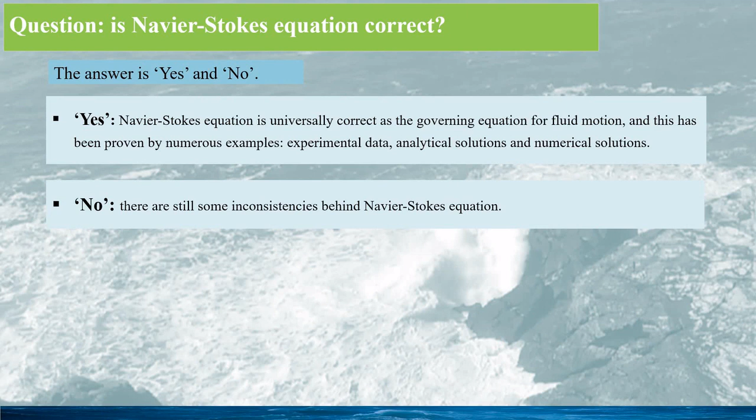For no, that's because there are still some inconsistencies behind the Navier-Stokes equation, specifically on the symmetrical stress tensor for fluid.

It is well known the Cauchy symmetrical stress tensor was originally developed for elastic material, the solid, and then fully adopted for fluid by Cauchy himself.

But how can we explain exceptions for the asymmetrical stress tensor found in real fluids? Is this Cauchy's law for angular motion also a prerequisite for fluids?

Can we have a different way to derive the Navier-Stokes equation? In this talk, I will answer all these questions.

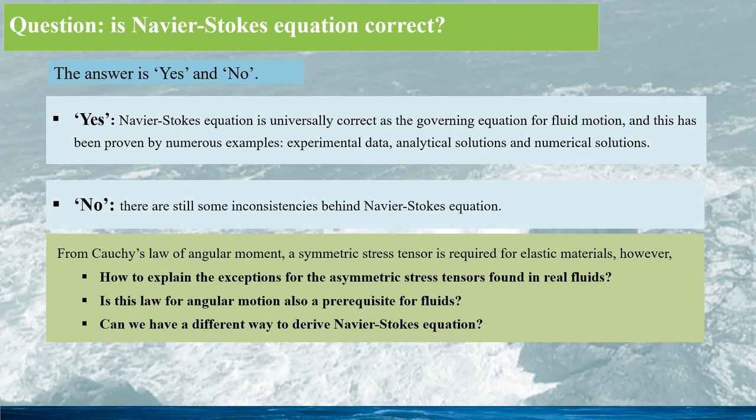First, let us look at a simple classical flow, the Couette flow. The Couette flow is confined between two large parallel plates. The lower plate is fixed and the upper plate moves at a constant speed at a distance h.

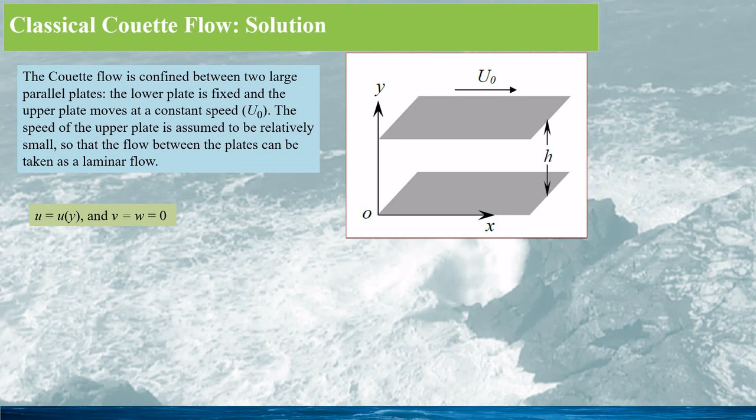The moving speed of the upper plate is assumed small, so the flow confined between these two plates is laminar. Based on the analysis of the problem, we can see the velocity components v and w are 0, and u is a function of y only.

As such, the Navier-Stokes equation can be simplified to this simple partial differential equation. Applying the boundary condition, we find the solution.

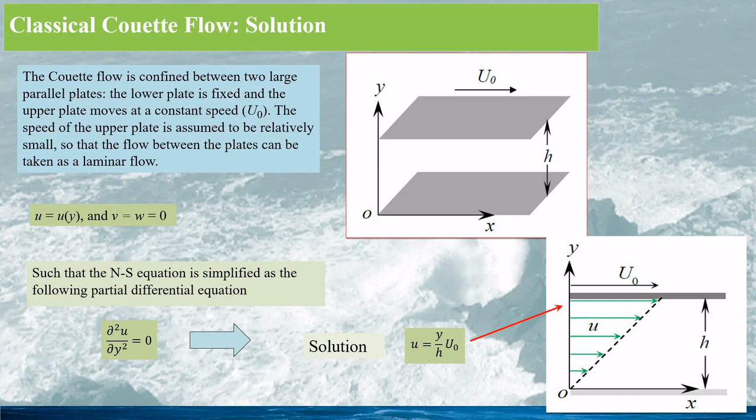This is a very simple flow. From the plot, we can see the flow velocity increases linearly with y.

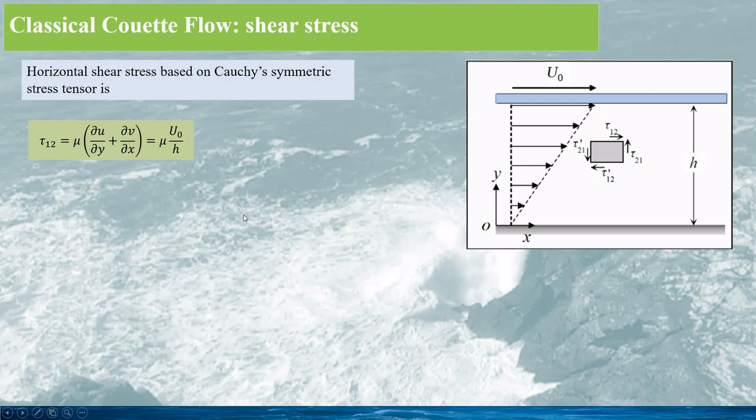In this slide, we are going to look at the shear stress in the classical Couette flow. From Cauchy's symmetrical stress tensor, we can easily calculate the horizontal shear stress tau12 as this. And from the requirement of the symmetrical stress tensor, the vertical shear stress tau21 is calculated like this.

We can see both horizontal and vertical shear stresses are non-zero. If we look at this, based on the symmetrical stress tensor, we have tau12 equals tau21, and tau prime 12 equals tau prime 21.

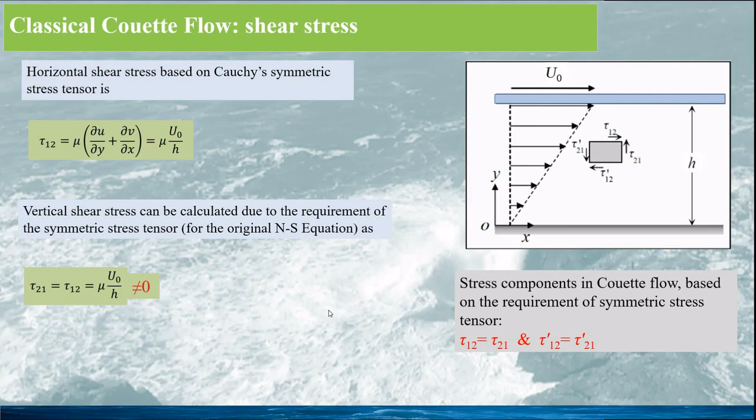Let's go back to the definition of fluid. From the fluid definition, it states a fluid cannot bear any shear stress at rest, and under shear stress, the fluid flows in the direction of the applied stress.

From the definition, it is easy to understand the horizontal shear stress tau12, because we have the horizontal flow in the Couette flow. But for the symmetrical stress tensor, there must be a non-zero vertical shear stress tau21.

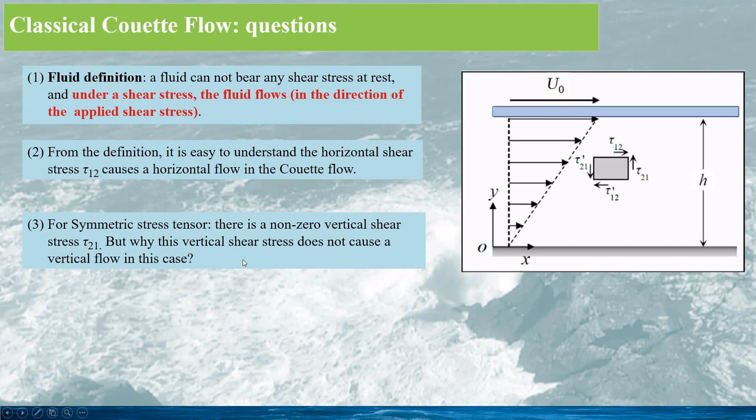However, why does this vertical shear stress not cause a vertical flow? From the fluid definition, in the Couette flow it can be concluded the vertical shear stress tau21 is 0.

The shear stress tensor in this case would be asymmetric, i.e. tau12 is not equal to tau21, since in the flow tau12 is non-zero, but the vertical shear stress tau21 is 0.

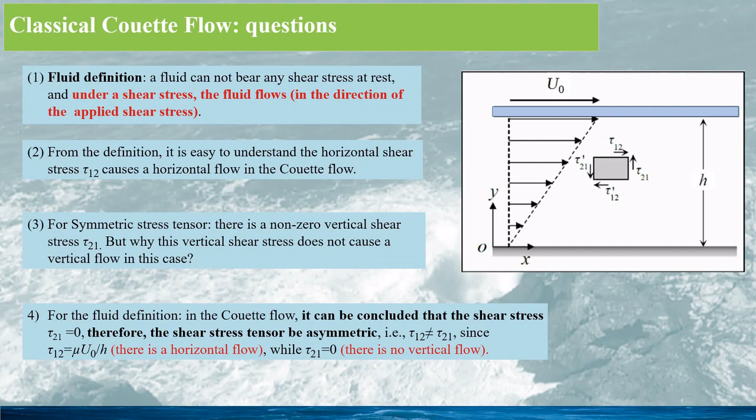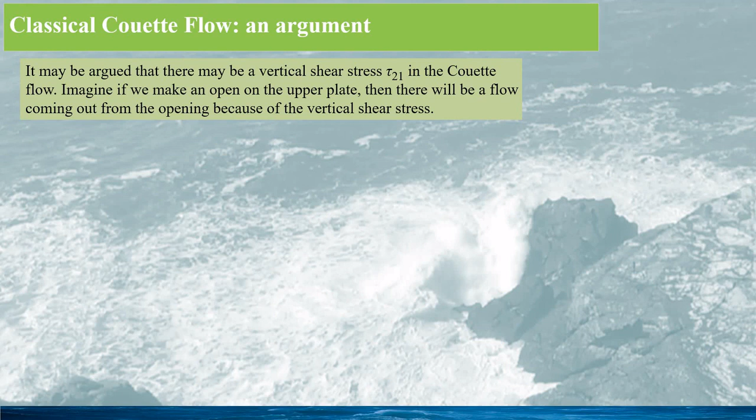There may be an argument that in the Couette flow there is a vertical shear stress, because the upper plate stops the flow moving in the vertical direction.

The answer for this is no, because in reality, whether there will be flow flowing out from the opening totally depends on the pressure of the flow between the plates. If the flow speed is large enough, there might be a suction of the flow in the opening instead of the flow flowing out.

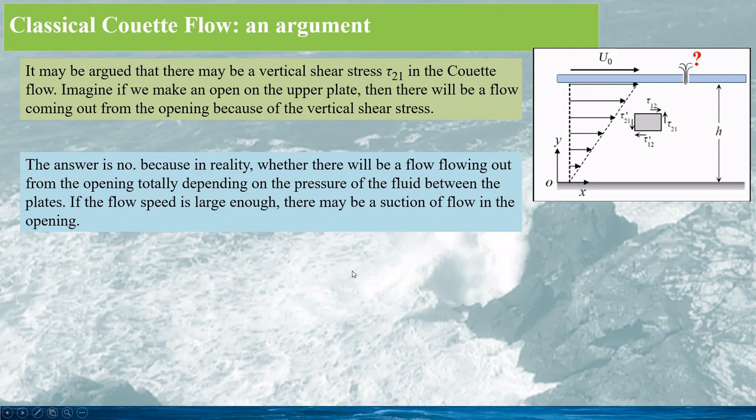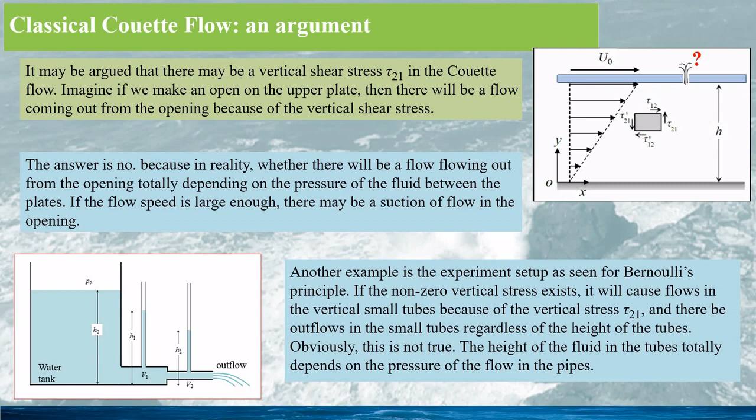Now we look at the situation for a shear stress applied on an element as seen in the figure. We will see what will happen if the element is a solid and if the element is a fluid.

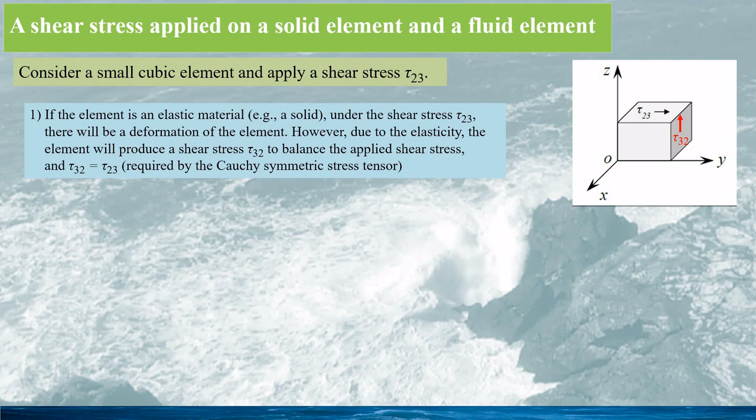If the element is an elastic material, for instance a solid, under the shear stress tau 2 3, there will be a deformation of the element. However, due to the elasticity of the element, there will be a shear stress tau 3 2 produced to balance the applied shear stress, and tau 3 2 equals tau 2 3. This is required by Cauchy's symmetrical stress tensor.

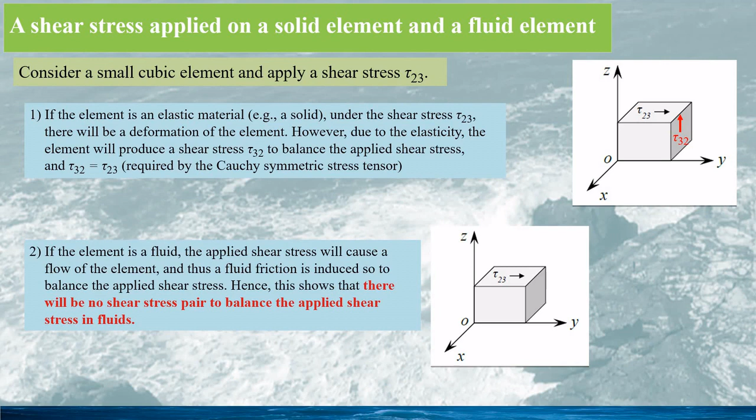If this element is a fluid, the applied shear stress will cause the flow of the element, from the definition of the fluid. Because of the flow, a fluid friction is induced to balance the applied shear stress. Hence, in this case, there will be no shear stress pair to balance the applied stress in fluid.

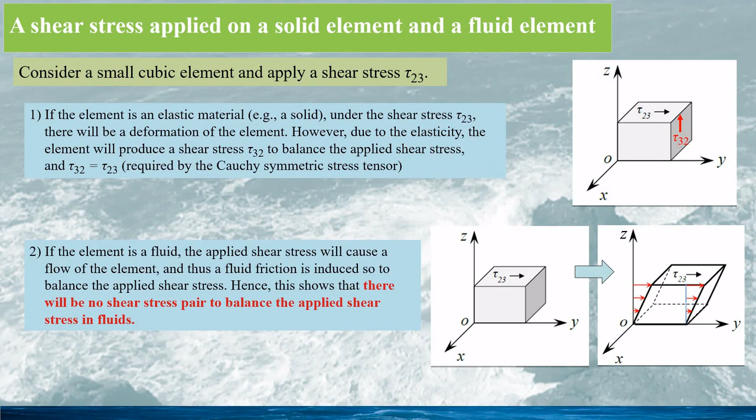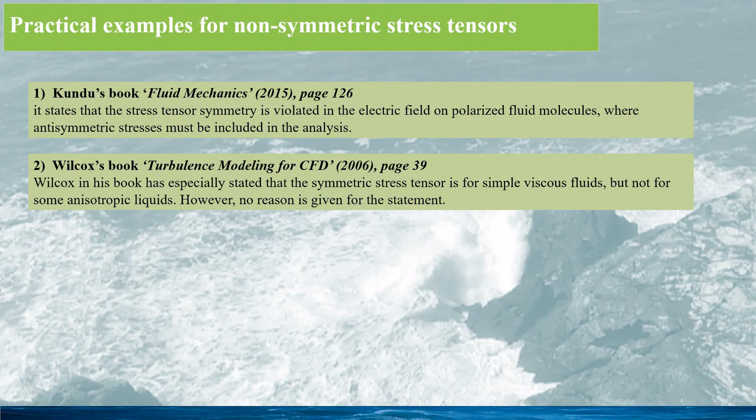Another example is the Wilcox book, Turbulence Modeling for CFD. On page 39, there is a statement: the symmetrical stress tensor is for simple viscous fluids, but not for some anisotropic liquids. There is no reason given for the statement.

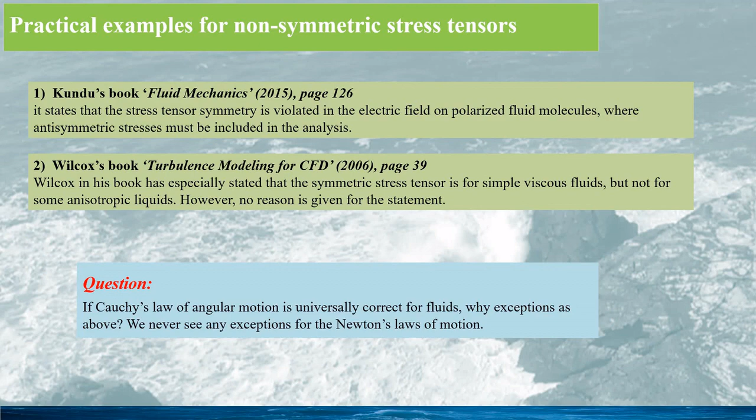Therefore, there will be a question: if Cauchy's law of angular motion is universally correct for fluids, what exceptions do we have as above? We never see any exceptions for Newton's laws of motion.

As we know from Newton's definition of fluid friction, the fluid viscous force is caused due to the different fluid speed at two joint spatial locations.

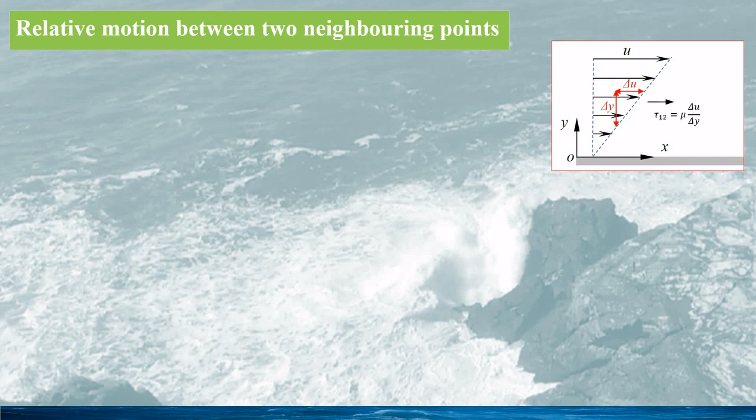Here we'll take two neighboring points in the field, A and B, and their relative velocity at a certain time is calculated here. For point A, its position and velocity are given as this, and for B, the neighboring point, its position and velocity can be simply expressed as the position and velocity of point A plus the small increment such as delta x, delta y, delta z, delta u, delta v, and delta w.

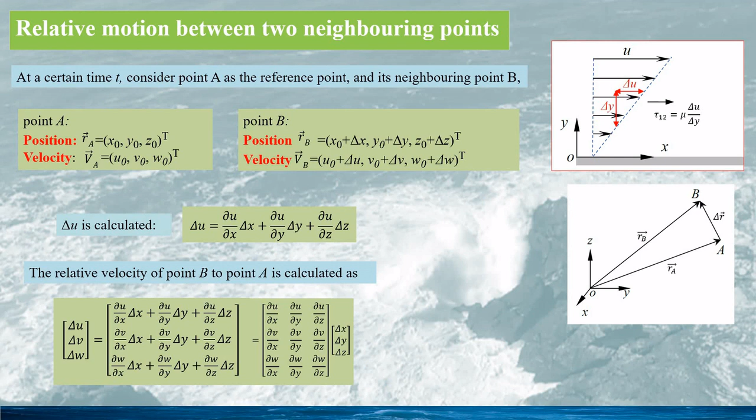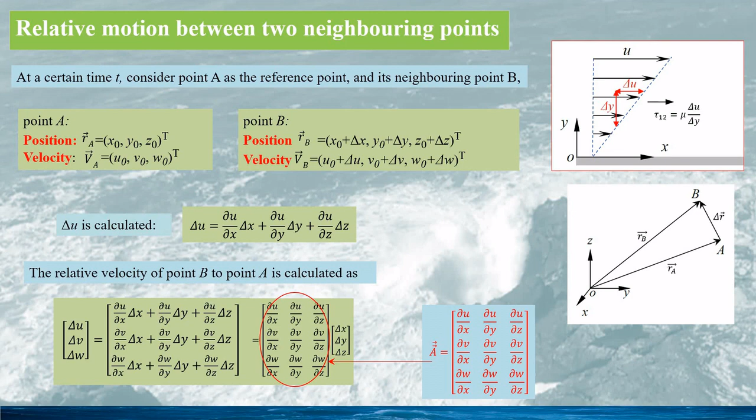For the relative increment, it is given by this. The velocity vector increment can be expressed as this, and this is the dot product of the strain rate tensor and the relative position vector delta r. Here we can see the strain rate tensor is not symmetrical.

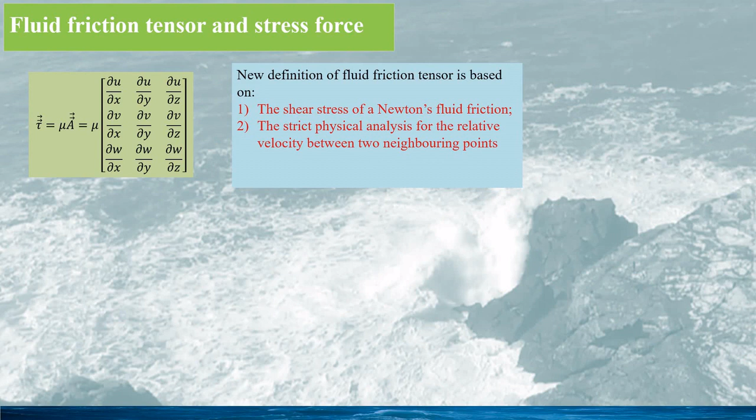Based on the strain rate tensor, a new fluid friction tensor can be defined as this. This can also be called the fluid stress tensor, but it is different from the normal symmetrical stress tensor. This tensor is based on Newton's definition of fluid friction. It is from the strict physical analysis for the different velocity between two neighboring points in fluids. A symmetry for the stress tensor is not required here.

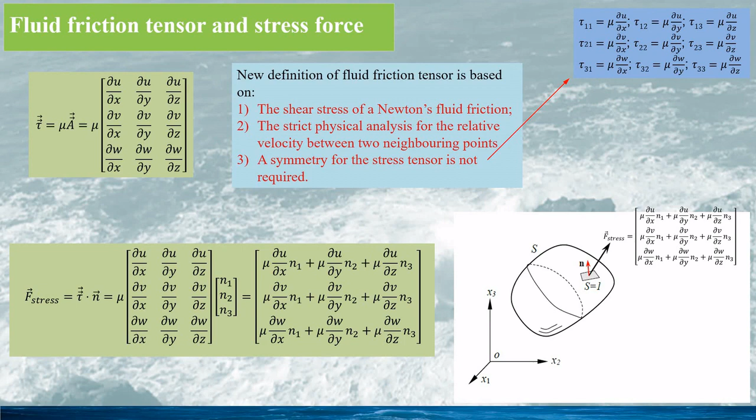From the stress tensor, the fluid stress force on a unit surface is calculated as this. In a plot, the stress force on a unit surface is given by this.

From the stress force on a unit surface, it can be seen the stress force in the x direction, Fx, is caused due to the increment of the velocity component u only, and the increment can be in the x, y, or z direction, as seen in the differentiations with regard to x, y, and z. Similarly, the stress forces in y and z directions, Fy and Fz, are only related to the corresponding velocity component increments of v and w.

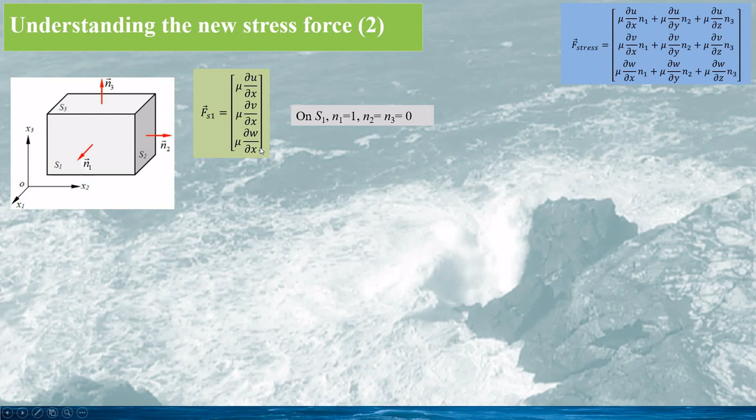Now we look at the special surfaces of a cube, S1, S2, and S3, on which the normal vectors all have only one component. On S1, N1 equals 1, and N2 and N3 are 0. So the force on S1 has 3 components, and same on S2 and S3.

So if we draw this stress force component on the surfaces, we can have the drawing as this. From this drawing, it can be seen that the new stress tensor has a better physical significance than that of the symmetrical stress tensor.

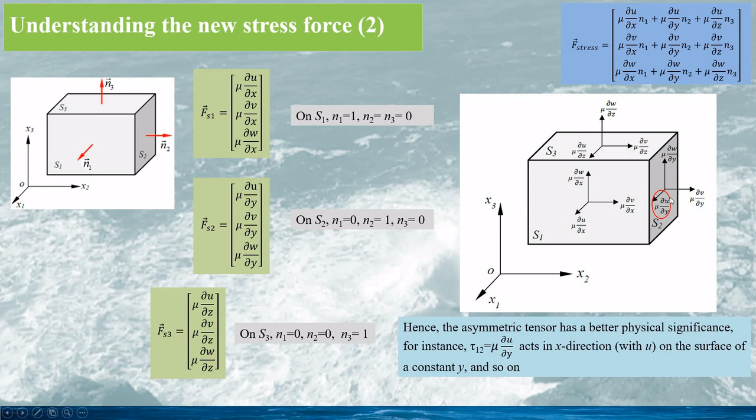For example, we can see the stress force acts in the x direction on a surface of constant y. You can see this is the x direction because of the velocity increment on the y surface here.

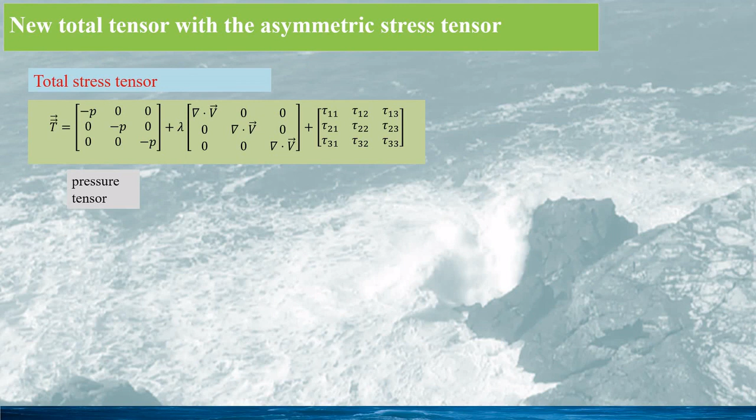Now we look at the total stress tensor. This is very similar to the symmetrical stress tensor. The total stress tensor contains basically three terms: the term from the pressure, the term representing the fluid compressibility, where lambda is the second viscosity coefficient, and this is the friction stress tensor. But here, the friction stress tensor is not symmetric, and the divergence of the total tensor is given by this.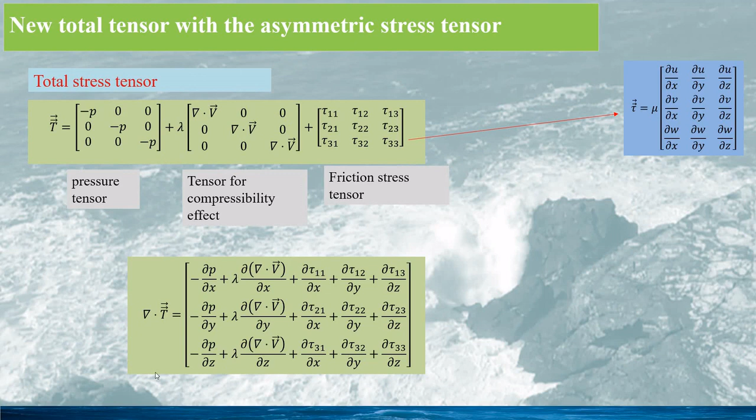Now we look at the last three terms for each component in the divergence of the total tensor, and also apply the new defined stress tensor. So we have the equation as this, and this, and this for velocity component u.

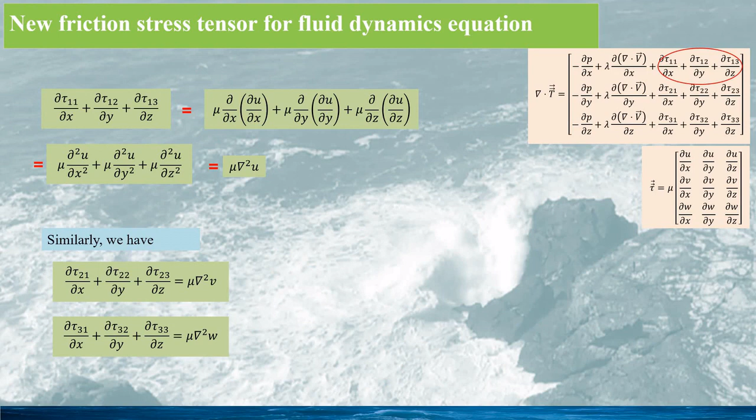Similarly, we can calculate the last three terms in the second component of the divergence of the total tensor, and the third component as this.

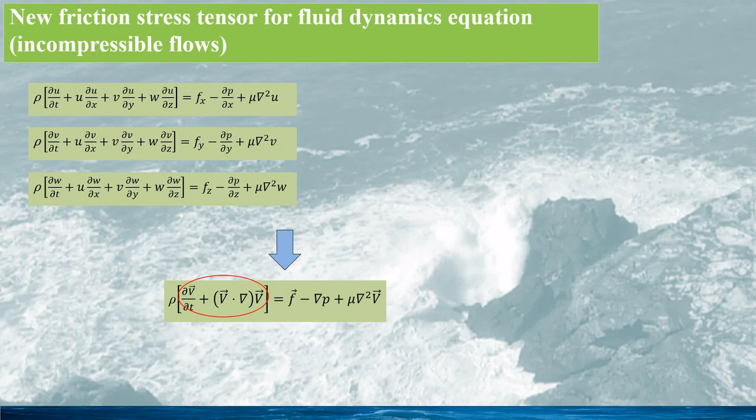Now we consider the incompressible flows. Putting all this together, we have the momentum equations for the incompressible flow. Writing this in vector form, it is this. And you can see from here, the substantial derivative is used in this way.

For the compressible flow, the momentum equation can be derived from the transport theorem with the assumption of the second viscosity coefficient, lambda, as 1/3 of the fluid viscosity, mu.

Writing this equation into vector form, so we have the momentum equation for the compressible flow. This is the same equation as the momentum equation in the Navier-Stokes equation for compressible flow.

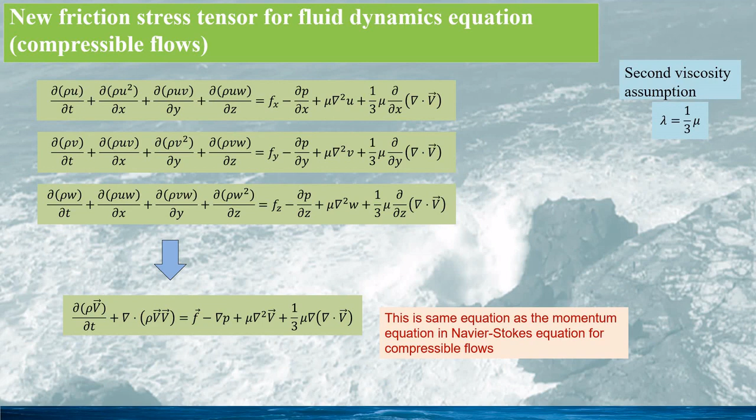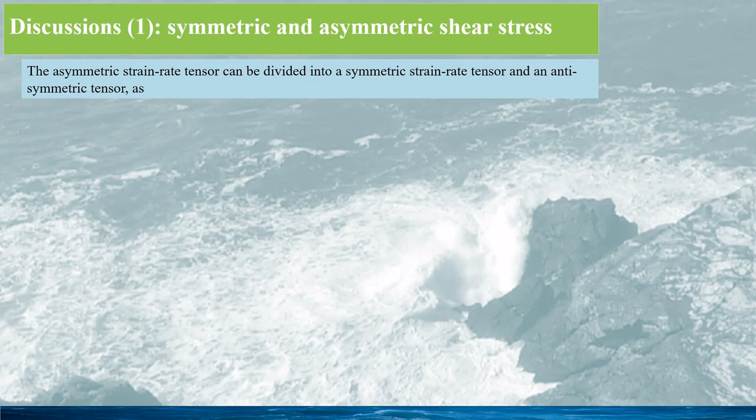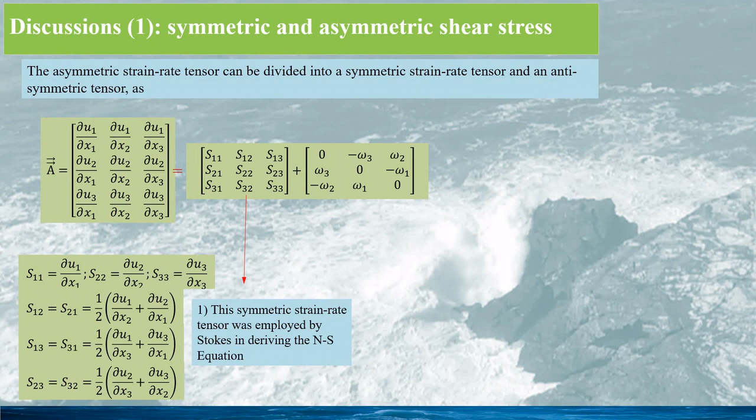We have discussed the symmetrical and asymmetrical shear stress. The strain rate tensor can be divided into symmetrical and antisymmetric strain rate tensor as this. The first part, the symmetrical strain rate tensor, was actually employed by Stokes in deriving the fluid dynamic equation. The components of the strain rate are symmetric.

The second term is the antisymmetric strain rate tensor, which corresponds to the rotational motion of the fluid, with the rotating components omega 1, omega 2, and omega 3. The vector omega is half of the curl of the velocity vector, as this.

It can be understood that in the original Navier-Stokes equation, the rotational motion has been excluded in deriving the fluid dynamic equation. The rotation motion might not cause shear stress in solids, but this is not correct for fluids. We will see this in the next slide.

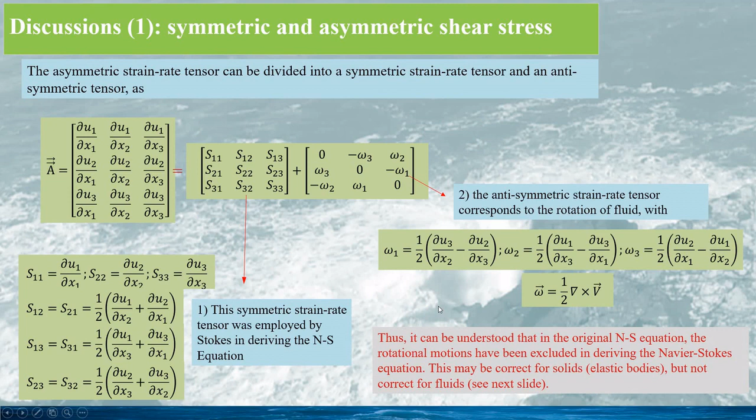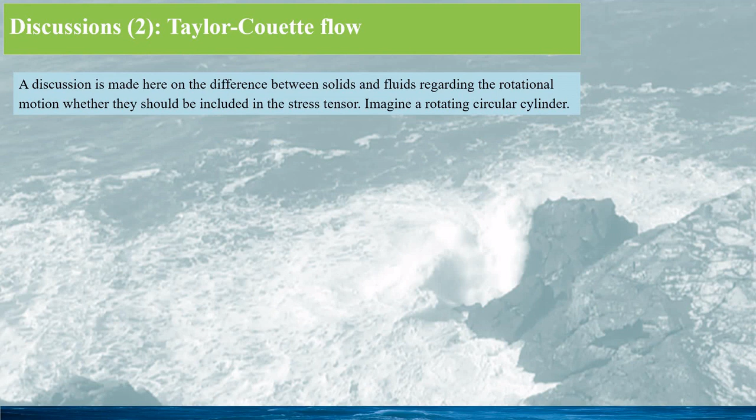In this slide, a discussion will be made for the difference between solids and fluids regarding the pure rotational motion, and whether it should be included in the stress tensor.

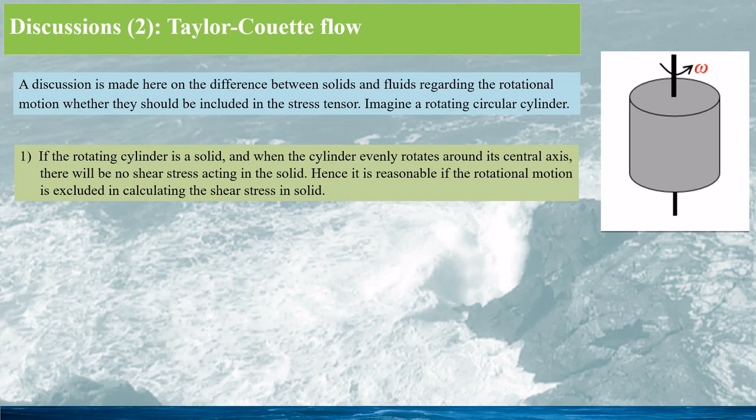Now imagine a rotating circular cylinder as in the drawing. If the rotating cylinder is a solid and the cylinder rotates around its central axis, obviously there will be no shear stress acting on the solid. Therefore, it is reasonable if the rotational motion is excluded in calculating the shear stress in solid.

However, if the rotating cylinder is full of fluid and rotates along its central axis, this would be a special Taylor-Couette flow for which R1 equals 0 and omega 1 equals omega 2. The flow in the cylinder will eventually rotate with the cylinder.